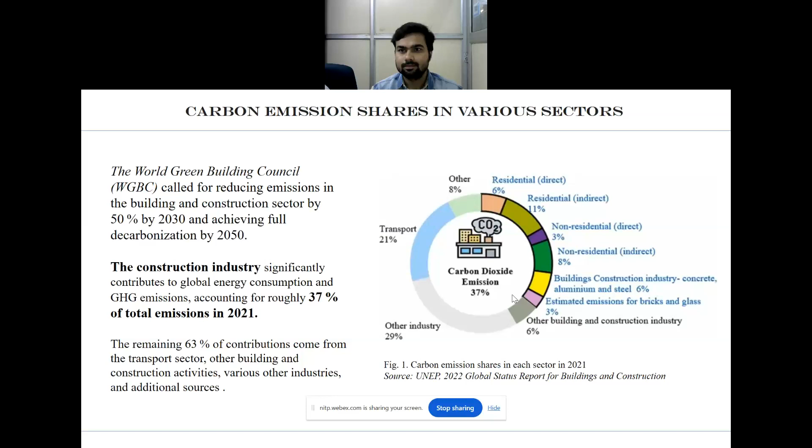So the remaining 63% contributions come from the transport sector, other building and construction activities, various other industries, and additional sources. So you will find that even though 63% is left behind, it is also mainly from the transport sector and other building construction activities. So in effect, total consumption goes above 60% from the construction industry itself.

Now let us see the next aspect of it. This is energy related to the building sector. So total operational energy demand of the building sector amounts to 34%, which includes 30% building operational energy demand and 4% usage by industries that manufacture building materials.

So if you see again the same way, the highlighted lines - residential is 21%, non-residential is 9%, and building construction industry is 4%, materials such as bricks and glass 1%, and other building construction industry is 3%. This is the UNEP report of 2022.

So you will find in all these things, the residential buildings, the building demand will be 34%. Now you have to combine and read the first slide and second slide together.

First is the carbon emission, which causes greenhouse gas emissions. And you know, these greenhouse gas emissions are causing climate change, overheating, and all those things. The heating increases, the temperature increases from year to year, and that causes melting of ice, and then it causes flood, it causes rising sea level. It makes countries lose their coastal areas, and we are all finding flash floods and all these types of natural calamities which are linked to this carbon emission, which is because of energy consumption.

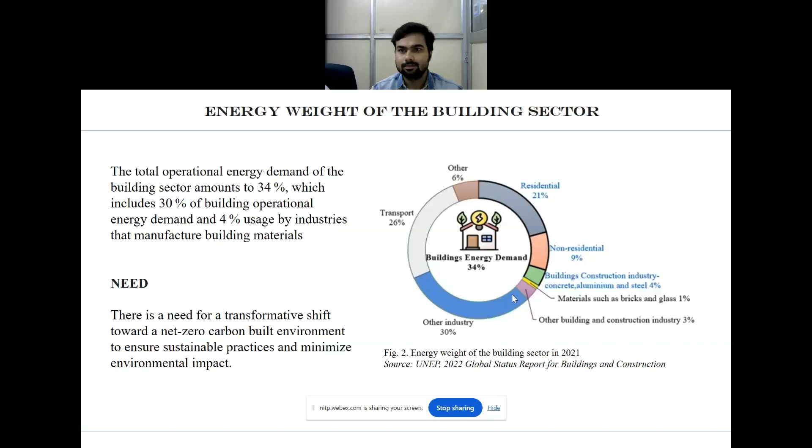Now let us examine the net zero concept. Net zero is a term that refers to the reduction of greenhouse gas emissions generated from resource consumptions to as close to zero as possible, and the concept is applicable to all resources. Now let's see which are these resources.

Net zero energy is one, net zero water is another, net zero waste is another, and net zero emissions is another. So you will find that basically solid, liquid, and gas, this is basically waste, and consumption also will be there in all these sectors. So net zero water is also important, net zero waste is also important, and net zero emissions is important.

Now just for an example, if we use the energy use, space heating, space cooling, domestic hot water heating, lighting, electricity for devices and appliances and others, these are the energy uses in it. Now you find that then the energy generation is basically solar, then photovoltaics, the solar thermal and geothermal and others.

Now a net zero building, its energy use is satisfied over a typical year by energy generation from the renewable energy sources. Although this is the working definition of net zero, we have to consider the total amount of materials consumed by the building phase itself, and then the operational phase, and then the demolition phase. All the three phases are to be covered, which I will introduce in the next slides.

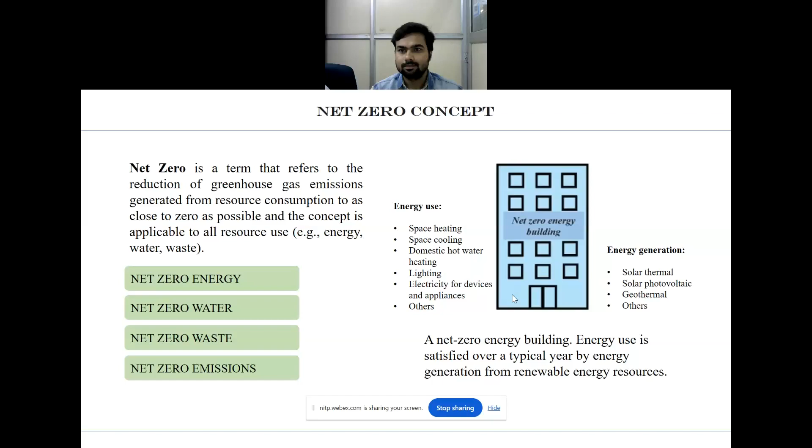So most important is the definition. How do you define net zero? Net zero is per year consumption of energy and per year generation of energy by the building is equated so that it becomes zero. But on the contrary, there are many more aspects to be considered while you go ahead with the net zero concept.

Now, the net zero energy buildings are characterized as zero net energy consumption buildings. The total sum of energy used annually by the building is approximately equal to the total sum of the renewable energy produced on site, etc.

So the figure shows here the total energy used in buildings and the local grid; whatever it is taking from the local grid, it is also given back to the local grid. So in a way, it is on a fulcrum, and you find that the energy use and energy consumption becomes net zero only when the energy used is equal to the energy produced.

So you will find that the products and services are the next 2 decades. See the projection. Now, if this is 2017, 2018, 2019, 2020, 2025, and then projected to 2035, it's going to exponentially increase. So since this is exponentially increasing, why? There is development going on, huge development going on around the globe.

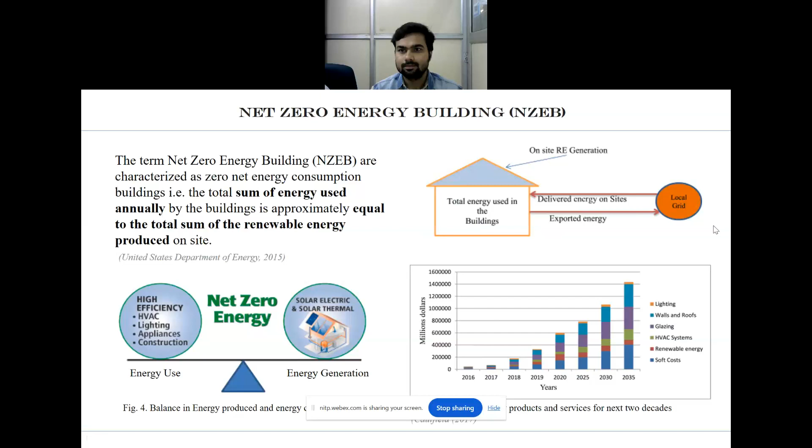Number one. Number two, climate is already changed, and we know that it cannot be reliable as in the older days. And we need all things to be brought back to the original state, which is called the resilience of the structure. So if a building gets vanished by flood, then that building has to be rebuilt. So this is another important aspect that you have to consider in it.

So in a way, you will find that we have this lacuna, the challenges, basically legislation, policies and regulations. There are no clear policies stating how exactly things are to be done. What are the penal clauses there? What are the effective working, like subsidies? Then the laws and regulations, awareness creation, and public education.

See, many of us know, we are learned people and we know that net zero is important. But then green is also important. It was the talk of the day every time some years before. Then it came to sustainability. Now it's coming to net zero buildings. Now we are all aware of it, but what about the end users?

See, for a green building, green rating systems are there. GRIHA is the national rating system. And if you want to get a GRIHA certification, the documentation process itself is costly. The money that you have to invest on a certificate is definitely a huge amount, considerable amount, and normally clients will not prefer that.

Moreover, that is the main reason why we are not getting that clear picture of how many buildings are green or sustainable or net zero. Now, everything requires a certificate in our life. So, are we willing to pay for the certificates, or are we going to really benefit from the strategies that we have used? This is a basic question.

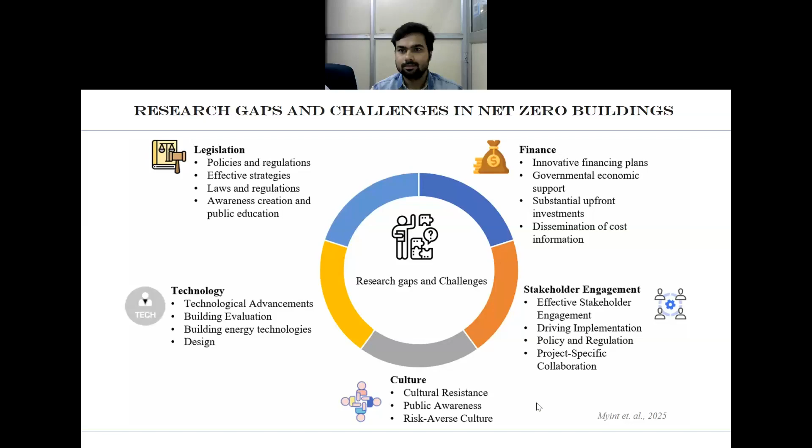Risk averse culture. Now we have a culture where we don't take any risk. So if you get a government job, then it is fine, life is secure. Now this is our attitude. On the contrary, those who get into high risk investments bring a lot of money to their account. So this risk averse culture has to be understood well, and we also should venture into taking risk, so that we will benefit from that.

That means, how are you going to use the already built materials? Will they return to reuse, or will they go through some sort of modification and be at least partly recovered? These are questions that we have to raise. So architects have a very high role in the first stage and in the last stage. Now, you will ask me why the architect is important in the first stage of construction.

I'll say that the construction is basically design to construction. That complete stage is there. So any decision that architects make is going to have a very high impact on the operational and the emission of carbon. So this is very, very important. And then what material you choose, what systems you adopt, that is going to have a big say on the end-of-life carbon. So this is why I say that the role of architects is very high in the beginning and the end.

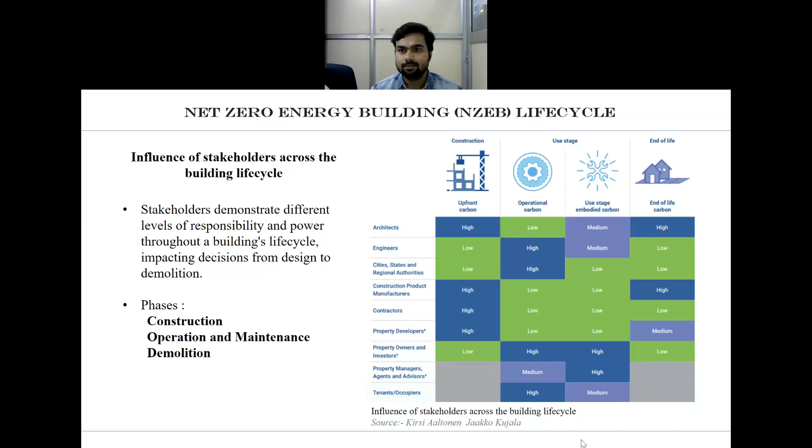But then you have to find the essential difference between net zero, green and sustainable. This is a question we need to address philosophically first, then systematically break down, and then do a value analysis of each of these things. Only then will you be in a position to proceed with the net zero building and achieve the net zero goal. Now, you might ask why this value analysis is important.

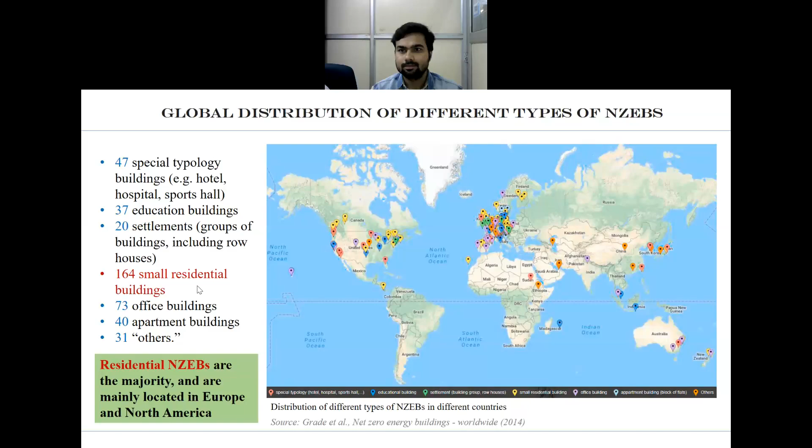Let me go forward. If you want to ask any questions, that also is permitted. Otherwise, I'll finish it and then you will get time for your questions.

Now, broad design considerations of net zero goals. As I told you, net zero site energy, net zero source energy, net zero energy cost, net zero energy emissions. What are the design principles? Design for comfort and function, airtight buildings, building enclosure. Why airtight? If it is air conditioned, then leakage is a villain. Whatever air comes through is going to affect the cooling efficiency of the interior. And the moment the cooling efficiency is reduced, the consumption of electricity is going to be on the higher side.

Controlled ventilation. You don't need so many air changes which are not really required. If you have more air changes, it is good, fresh and fine. But you need to strike a balance, whether you need the right amount or are you going to exceed that. And the codes are coming to your help here. So insulation that exceeds present energy code requirements is needed. The insulation prescribed in the codes is what it is, but how you can increase the insulation is another thing that comes under maintenance.

For example, even if you use rock wool for insulation in an air conditioning duct or some other area where you need insulation, imagine that the maintenance is poor and water starts leaking. The moment water comes into these insulating materials, it alters the capacity of the material to conduct heat. That will differ, and the insulation value will also be very, very low. So control water, moisture and movement by building.

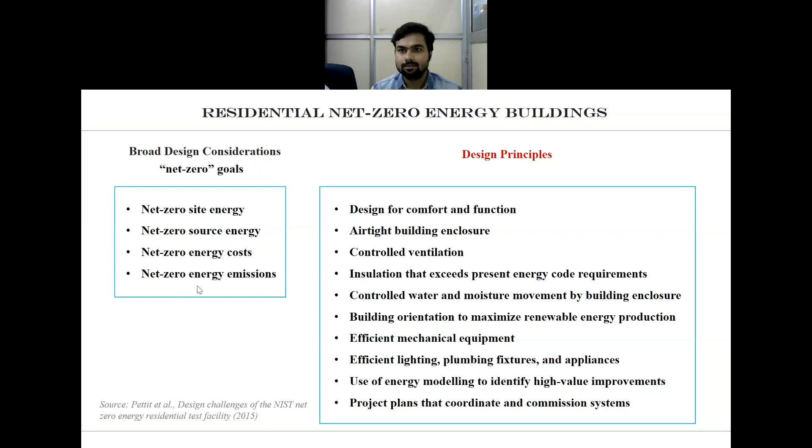Hello. Hello. Hello. No, sir. No issue.

Please continue. Okay, fine. Controlled water and moisture movement by building enclosure, building orientation to maximize renewable energy production. This is something which we learn in our second year climatology classes, but they are very important. If you orient to the western direction, then definitely it is going to get heated up. In spite of the greenhouse effect and all these things we are studying, it is going to affect the air conditioning cost of buildings.

Why are we still preferring glass facades, style, contemporary choices? You want to match up with something that you have seen in the Gulf or in the US or some other country. I don't know why the Gulf is using that. They have their own wonderful traditional architecture. So we will have to go back to our traditions. We will examine these aspects also. Efficient lighting, plumbing fixtures, appliances. You know that waterless urinals are available, but how many of us use it?

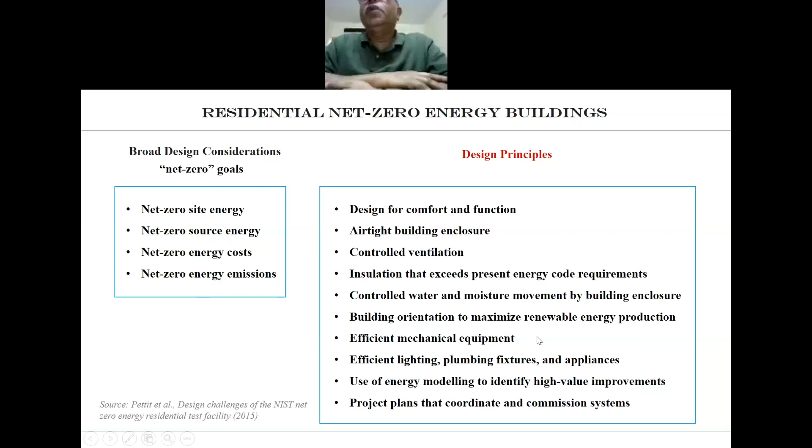Use of energy modeling to identify high value improvements, and project plans that coordinate and commission systems. So we will have to look into all these aspects if we really want to go ahead with the net zero goals. Moving ahead, you will find that the methods to achieve residential net zero buildings are energy infrastructure connections, renewable energy sources, and energy efficiency measures.

Now, electrical grid, gas pipes, you will have to find out. Then district heating or cooling systems, then biomass, and all these aspects will come under energy infrastructure. And then you have renewable energy sources, which are basically solar PV, wind turbines, biomass, and then site renewable power, purchase off-site renewable power.

Energy efficiency basically means building design, efficient HVAC, efficient appliances, efficient controls, and efficient occupant behavior. Let's discuss why occupant behavior is important—this is something you have to think about.

When you have an air conditioned building, how many of us don't close the rooms properly? We just think, okay fine, let the AC run, I can afford it. But with that attitude, how many of you switch off the fans or the bulbs when you come out of the room? These are all behavioral aspects.

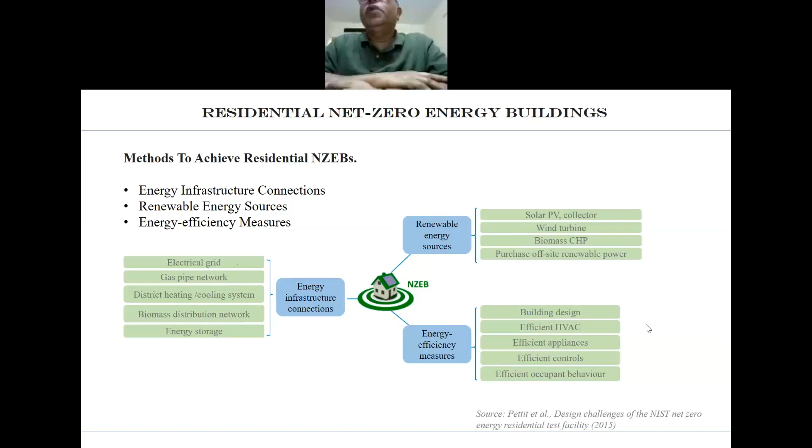If people have an attitude for sustainability or net zero, only then will they be in a position to save energy where it is otherwise wasted. And as I already told you, energy saved is energy produced.

The building sector in India is growing at a rapid pace, and we project 60% of our development will happen in cities. Green buildings have demonstrated about 25 to 30% reduction in energy consumption with respect to national baselines, achieved by implementing energy efficient practices and technologies.

There isn't anything very scientific here—it's basically adopting already existing tools and techniques, adopting our cultural practices and heritage architectural principles, learning from them, and applying that sensibly so energy performance can be increased, energy efficient building envelopes brought in, air conditioning reduced, lighting made appropriate, appliances appropriate, and thermal comfort achieved rather than highly cooled spaces.

Then you go for renewable energy. Wherever energy can be renewed, you will have to go for it. These are some of the principles involved.

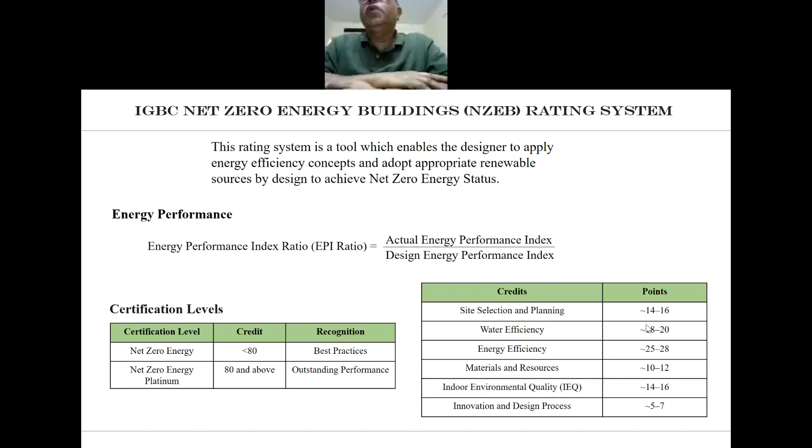So net zero is not simply something unachievable. Net zero is achievable provided our attitude is favorable for that. Now look at this one—these are not certified buildings.

This is the Humanscapes Habitat Urban Living, Auroville, Tamil Nadu. They don't need a certificate for it, but they are almost net zero buildings. Here the brick vault is used, and you need plastering over it, and then the brick vault is ready. Why do we need other types of construction where we use a lot of concrete?

Instead of concrete, they have mud brick walls, compressed and stabilized. Good quality earth is available there, and Auroville makes use of that. So you will find that all these are basic things, and a very minimalistic attitude is adopted all around.

Each of these shells will exert a thrust, so you need a ring beam all around it, and the same ring beam is extended as a roof extension. So multiple roles are assigned to structural elements and built forms, in such a way that you can avoid duplication of materials as well as structures.

It's a community house, and you will find exposed brick, concrete, local building materials, kadapa stone, natural stone flooring. They haven't gone for very high-end tiles. They haven't gone for steel doors. They have gone for the quality of wood which is available there, which is good for construction.

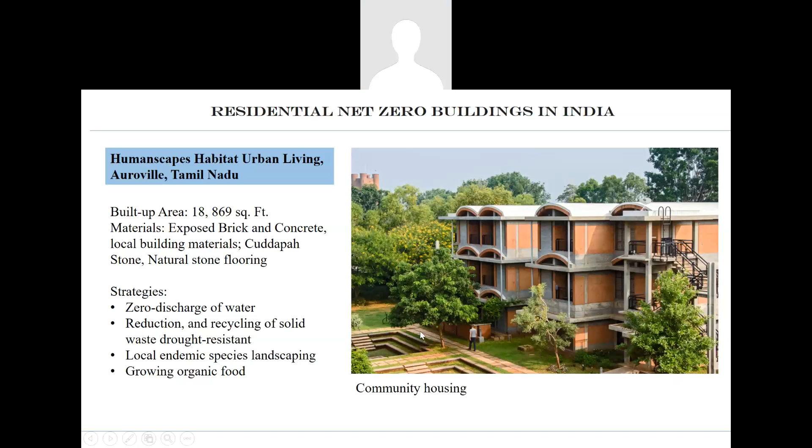So you will notice that the site itself is designed so that the heat intake onto the ground and surrounding area is reduced. You will find more greenery, more brick and other materials, which reduce the thermal capacity and also the reflection of light from the surroundings into the interior.

Now this simple aspect can be taken into a little more detail. We know water is cooling because of evaporation. If there is no wind, the cooling will reduce. So what do you do? You use jets or fountains. But what type of fountain? The more the jet, the more power and electricity consumption.

So bubble fountains, on the contrary, like what is seen in Mughal gardens—the chadars—simply flow water from a level over pebbles, and these pebbles cause aeration and cooling to happen. It's a passive technology. But instead of passive technology, if you use active technology like fountains, that affects the entire electricity consumption. This is one simple example I can bring in.

In the Mughal gardens, the Thuja orientalis trees, conical in shape, are used effectively to direct wind to the trellis, which is made of marble—a high thermal capacity material. When wind passes through this trellis work, it gets cooled, and the cool air comes into the interior. See how effectively they thought about it—without any active energy, they used principles that are basic and sensible. Sensitivity is important, and sensibility is important. That will lead to sustainability.

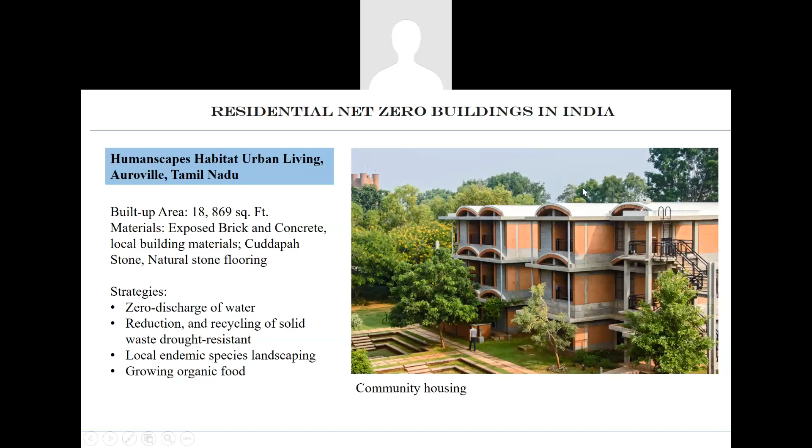Now let's go further to Humanscapes Habitat Urban Living, Auroville, Tamil Nadu. It's the same building, but you'll again notice the points I've mentioned. You'll find these facades everywhere have a projecting canopy. The canopy is very important—just because you have clean forms doesn't mean you get good architecture. Fenestrations and shading are required, and of course you get patterns from the type of technology used, giving a newer type of elevation. You don't need to work hard for it, but you have to make careful choices.

The techniques they have used are basically solar passive building design, integration of water, energy and waste planning, clean mobility options, co-housing concept of living, light and ventilation, and local materials.

Now coming to co-housing: for example, if I have my bedroom, living room, kitchen and all those things, I'm not using the kitchen every time. So two or three families can share the same kitchen—this is our old joint family concept.

So many rooms are there, and the rooms are allotted to people, and the people have a kitchen there. Basic food is served. Rest of the things, if you want to make a bullseye or if you want to make an egg fry, you can go and cook it on your own. The kitchen is for everybody, and they can definitely get the basic meal. But at the same time, if you want to cook something, that can be done by yourself.

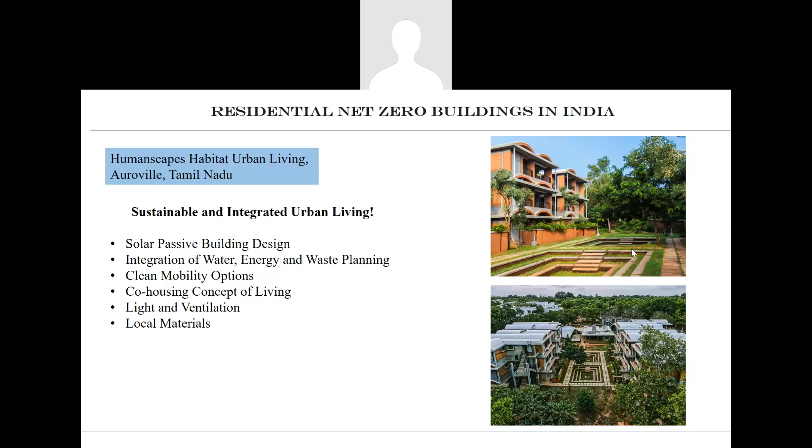So it is not something very cosmetic and cosmic. It is something very sensible, pragmatic, and appropriate. And it is an attitude. So if you keep that attitude valued very high, then constructing and operating net zero buildings is not a distant dream. It is something which you can achieve.

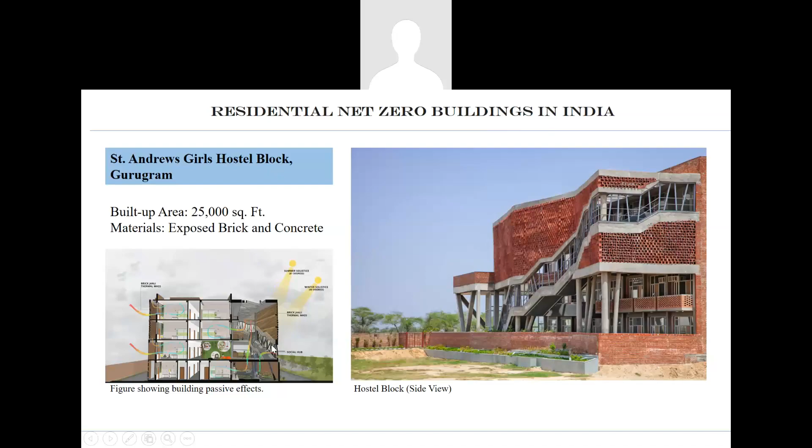Now, this is residential net zero buildings in India. It is St. Andrews Girls Hostel in Gurugram. Now, see, one thing that I just wanted to tell, you have completely double passages. So you will find that, of course, it is lit and ventilated. Here also you find there is a veranda. So the skin is protected by another skin which is exposed, and air breeze will be there, it is airy, and it is also shaded.

Now just look at the traditional Indian buildings, wherever you are, whether in Bihar or in Kerala, the same principle they have adopted there. If you look at the Kerala architecture, there also you will find a clean veranda all around the built form. So the built form is not directly exposed to the sun, wind, and rain, but on the contrary, there is a veranda to protect it, and that means the amount of energy required to maintain that building is far less.

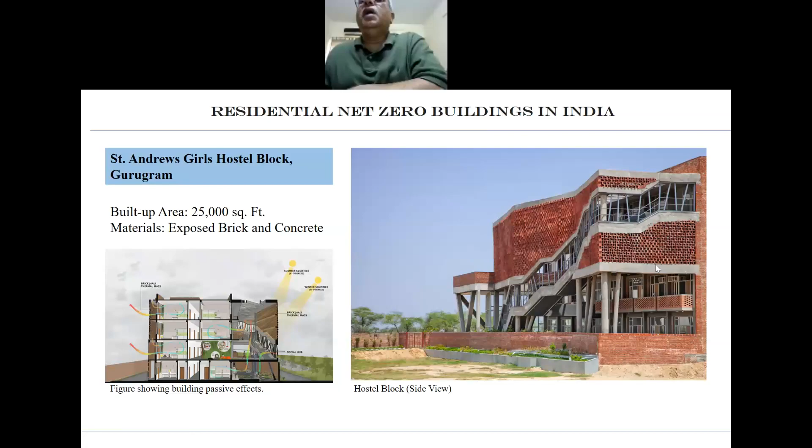Let's go quickly. You can see here the double verandas. You can see here it is pergolas. If you wish you can cover them, but this is already aerated. It is end to end open. So you will find that the entrance foyer and the lobby face to the west, but it is open. Double height indoor and outdoor spaces for interactions and social activities. Then double skin facade. This is called the double skin facade.

Now, this double skin facade, you may think it is going to increase the cost of construction. No, you see that they have used very basic ordinary materials for it, and that is very critical use of it. So instead of glass and steel handrails, they have gone for a simple brick jali suitably designed. So you get something here. All the beams are exposed.

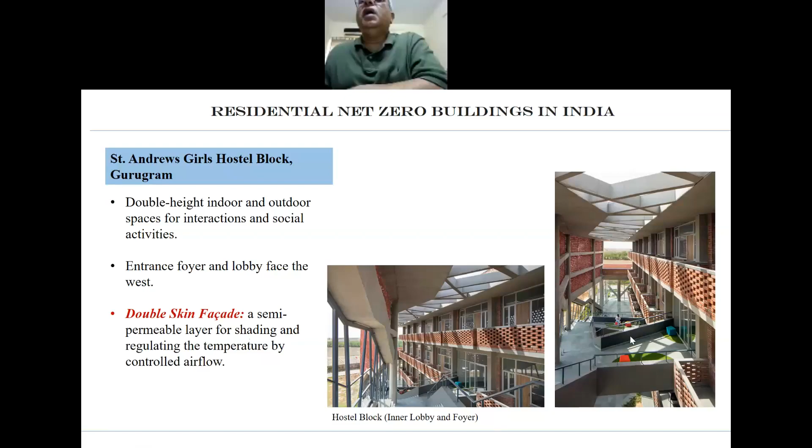Now, see, exposed surfaces. You see everywhere there is a shadow. There is a play of light, and you have enough ventilation. And the flooring is also not that costly; what is available looks like Cuddapah stones. So in effect, the building form is sensible. Now, this sensibility is very important. As I told you, it should be pragmatic, sensible, and you must be sensitive to things and keep that attitude of net zero in.

Now, let us see net zero built forms, design parameters. Passive design parameters are azimuth angle, the window status, exterior wall thermal insulation, exterior wall solar absorptance, roof thermal insulation, roof solar absorptance, window-to-wall ratio, window types, and overhang projections. Now, this overhang projection, I explained. Everywhere you can go for explanation, but we may not be able to cover the full lecture then.

That's why I'm limiting and giving you an example. This absorption is very important, solar absorption, which we dealt with already by improving the properties by the use of white colors. We have already explained. Now, overhang and projection.

Overhang projection, basically what is it? You imagine an umbrella over your structure. That is the overhanging projection. That means your structure is all protected, and everywhere, even brick can be overhang bricks. See, when you put the brick projected out of the wall, alternatively you will get a self-shaded wall.

And self shading of the walls means it is already protected from the radiant energy directly coming onto the brick. So that means it is already in shade. Only thing is small shades cover the entire surface of the brick wall, and such type of built walls will have less exposure to solar energy, and therefore it becomes more cooled in that process.

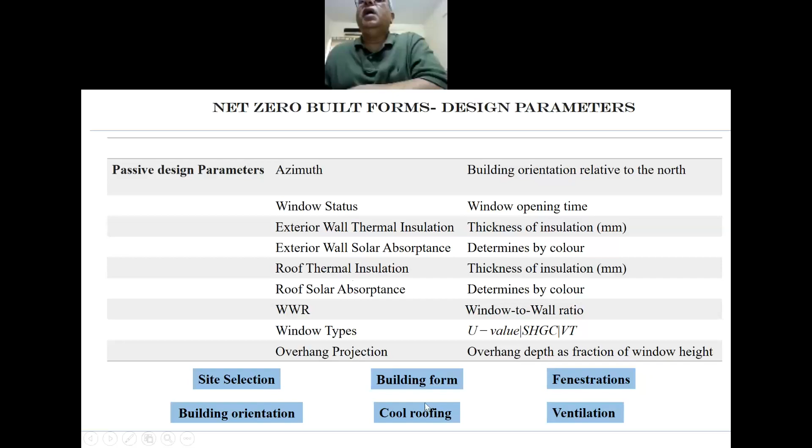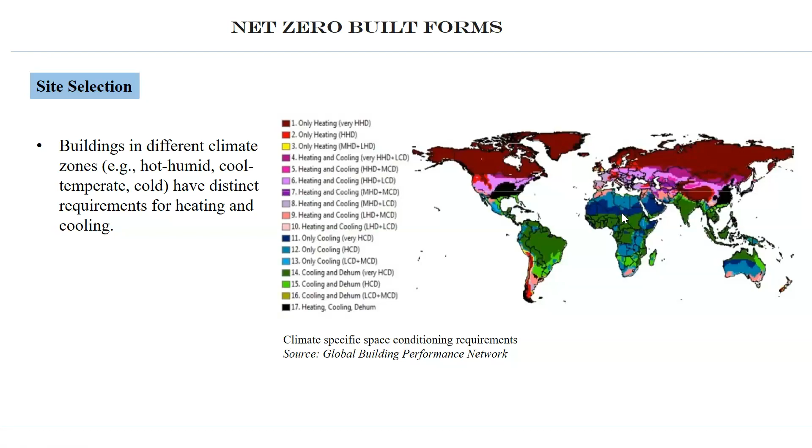So if you look at the African situation, they have all passive type of technologies, and you will find that they learn from nature a lot, and they also go for adopting such techniques, which you will study as biomimicry, which I will come to later.

Now site selection, which are the factors you will look for? Solar energy, radiation, climatic effects, accessibility, population density, green space availability, proximity to renewable energy sources and materials. So heat gain, if you want to reduce it, the orientation is important. Mapping of land surface temperatures is important. Evaluation of transportation networks and connectivity, because transportation is important.

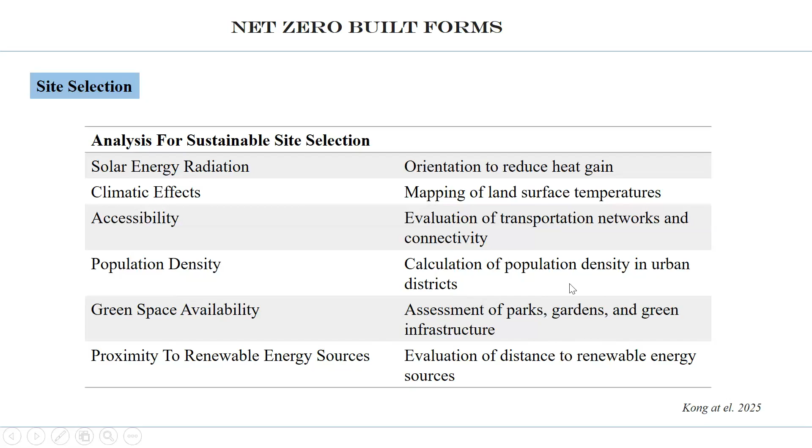Calculation of population density in urban districts, that leads to different services and assessments. Now assessment of parks, gardens, and green infrastructure. You know that there is something called the urban heat island. So if you want to mitigate the urban heat island, then the amount of green surfaces must be more, green and blue surfaces must be more.

Coming to the other site selection and development, protecting sensitive sites, preserving undeveloped sites, say like green fields, brown fields, gray fields, etc. Then restoring and reusing previously developed sites, retaining soil in place, stockpiling and reusing soils, etc. I'll give you a simple example to illustrate that.

I was designing the master planning of NIT Andhra Pradesh. Karaikudi or something like that. That place I don't remember, but that was an old airfield. So my intention was to keep the runway as it is as the main thoroughfare, and then build your buildings so that you can save a lot of money on the roads and other aspects, and then you will get an axial design also for the buildings. And it was working quite well.

I designed the built forms also and then presented there. They accepted it, but then came the central PWD. When the central PWD came, they brought in their own zigzag forms of design and all fancy shapes and materials and all those things. See, the interest lies elsewhere, not in net zero. Interest lies in profits. The profits, in whatever form, I don't want to elaborate on that, is something that bends your mind away from net zero.

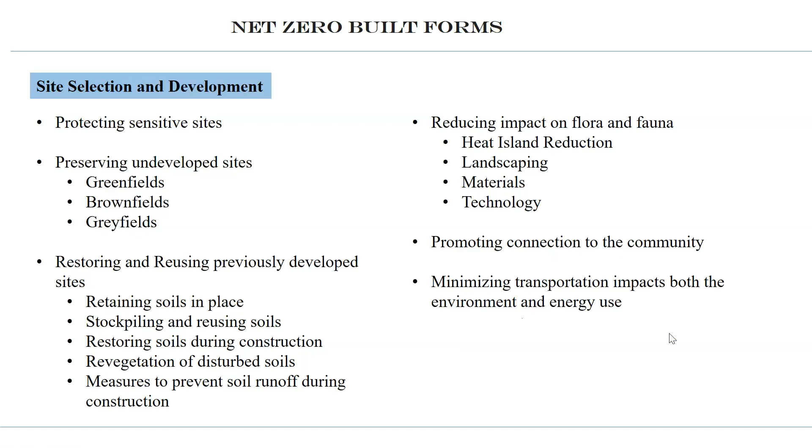So the quality of work, sensibility, sensitivity, and the performance are very important. The implementation of standards, prescriptions, and specifications are also very important in achieving it. Now here we are seeing the building orientation. If you orient to the south, then you will get a lot of energy. On the contrary, on the northern side there isn't such incidence of solar energy.

Now sizing. See, for example, a sphere has the maximum volume and smallest surface area. Can you use that mathematical principle to design something? Buckminster Fuller used it.

So floating cities he designed with the Fuller domes. Now similarly, a circle gives you maximum area and minimum perimeter. That means material consumption will be directly affected. Now these are concepts. These concepts are to be appropriated into your design.

Fresnel squares, as I told you: one square is there and within that is the site, meaning you have to bring the buildings to the periphery, and then you have an interior and exterior landform where you can have plants and other things.

So, in effect, what I am saying is your built form should not be exposed to the aspects of weathering. On the contrary, you can have a total projection over it and then shield the whole building. Otherwise, you will have to do it later on when your roof starts leaking. You will have to put another roof.

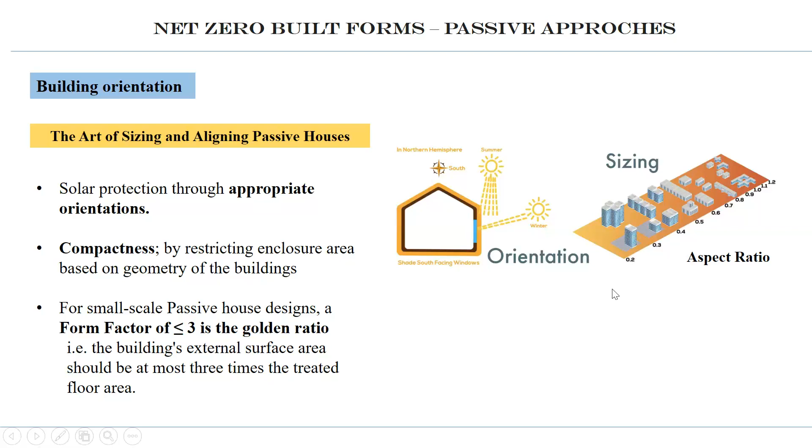Similarly, when you consider the aspect ratio, also think about the wall. What is it made of? Is it again glass? Then it is going to be a hot oven inside. You must understand and appreciate that and tell the clients to go for something which is good for achieving your net zero goals. Now, similarly, the built form design.

See, if I design the building like this, I have more area, at the same time it is landscaped, and the exposure to environmental elements is less. Now here it becomes two blunt blocks, and you have a tree, whatever it is, but the exposure is there.

So the angle of exposure, the threshold is 18 degrees; an angle of enclosure of 45 is equally covering both sides. Now, if you want wind flow, the spacing must be 2h. If this is the height, then the spacing has to be 2h, at least 1.5h should be given. Are we considering these aspects? This is something we need to consider when we design for building energy efficiency.

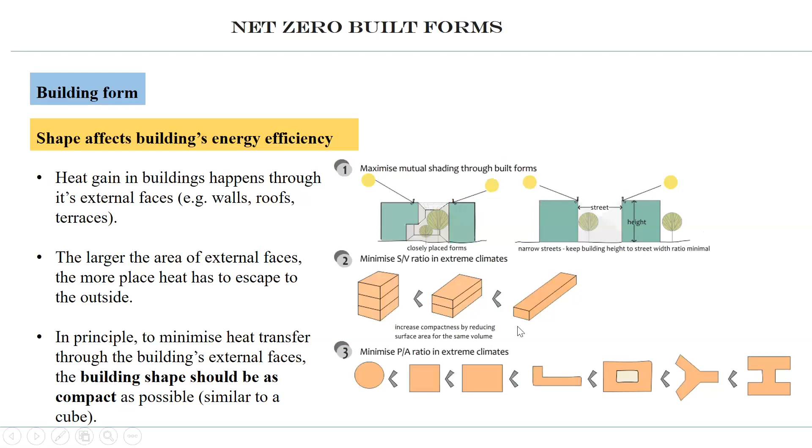So, building shape should be as compact as possible. At the same time, it should also promote ventilation and the maximum amount of views available, which will refresh your minds. That means the building becomes not a simple enclosure but a habitable space where people are happier, healthier, smarter, and able to enjoy the building.

Now, just as a simple example, I'll give you a 400 square meter building. Just design the floor to floor height, whether it is 3 meters, 3.15, or 2.75. You work out the amount of materials required for the periphery walls only. Simple building, don't go for inside connections and partitions. Just the 400 square meter residential built form, which is a reasonably higher income group building.

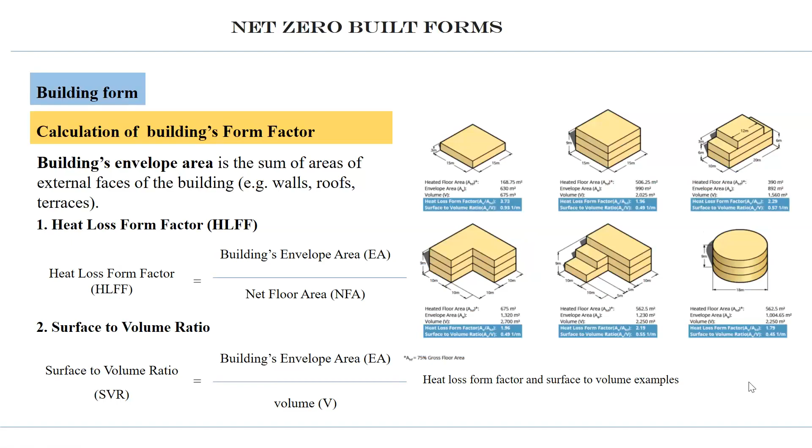So you will find that the amount of bricks, mortar, plastering, ventilation, lighting, all these things are going to be different. So in effect, working out the heights itself is a very, very important step in obtaining your net zero building goal.

Now you will find that there are so many principles. See, cool roofs, green roofs, these are all traditional ways of protecting by reducing conduction. Now you can have a cool roof. Maybe it is water, maybe an exposed white surface, roof ponding, so many things. And you can also measure the internal air and ceiling surface temperatures pre and post application.

You will find that the upper temperature, compared to pre-application, has come down by at least 10 to 20 percent. You will find the difference.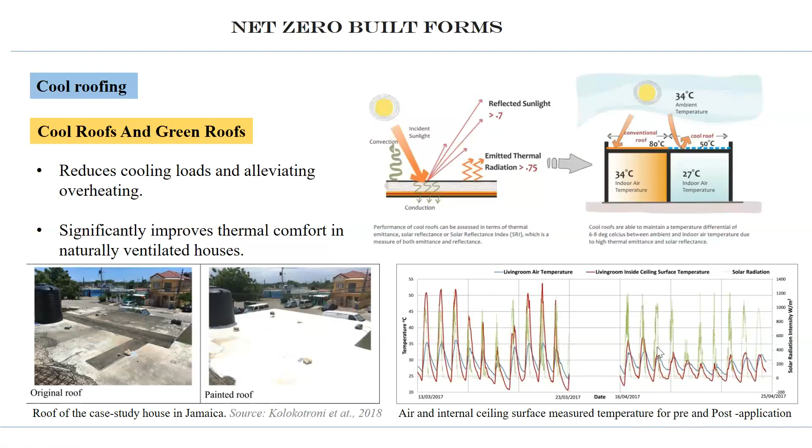Now, when you say cool roofing, there is urban farming. This is one concept which I wanted to introduce to you, where you cultivate whatever vegetables, whatever things you want on the roof. Now it has got a double advantage. You have your vegetables, and at the same time you have your cool roof also.

Now it has got a lot of benefits. Say for example, if there are an old father and mother, aged people there, they can go up and maintain it and all those things. Children can go up and enjoy, take part in it. There is more activity.

See, the problem is there are no engagements for children, and they go on using WhatsApp and other things. And I don't know what Instagram is. All those things are there, spoiling their time. And they say, finally, in the end, I don't have time, mummy. I don't have time to do this and that. Why don't you have time? Because you are using it. Time is constant for everybody, 24 hours God has given, but how you use these 24 hours is very important.

So if you go for a green roof with urban farming, or you can call it roof farming for simplicity's sake, then you will find that these roof farms or urban farms are very good. Wherever the consumption is, there the production is. If the consumption is also where the production is, then there is no transportation cost involved, no pollution, no energy. See, your dependence on other forms of energy, maintenance, and all those things is reduced.

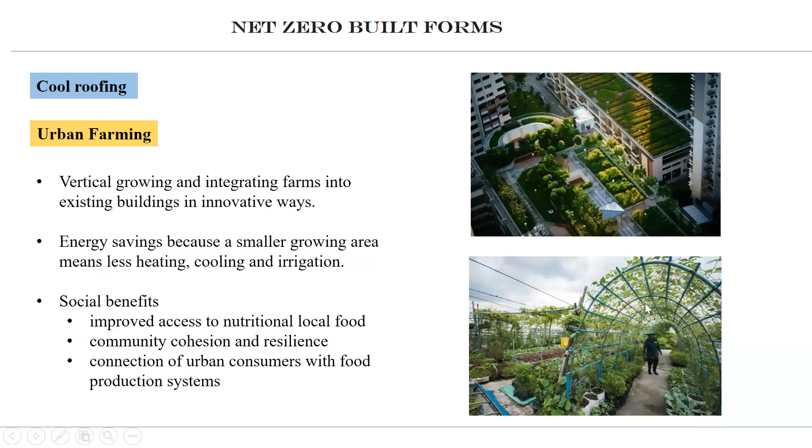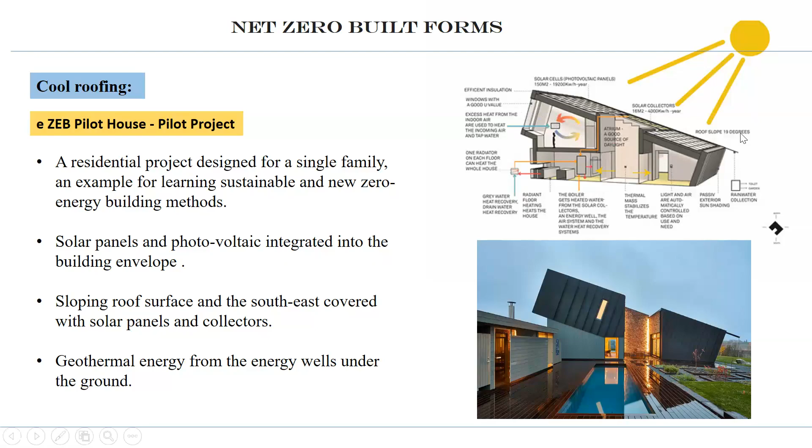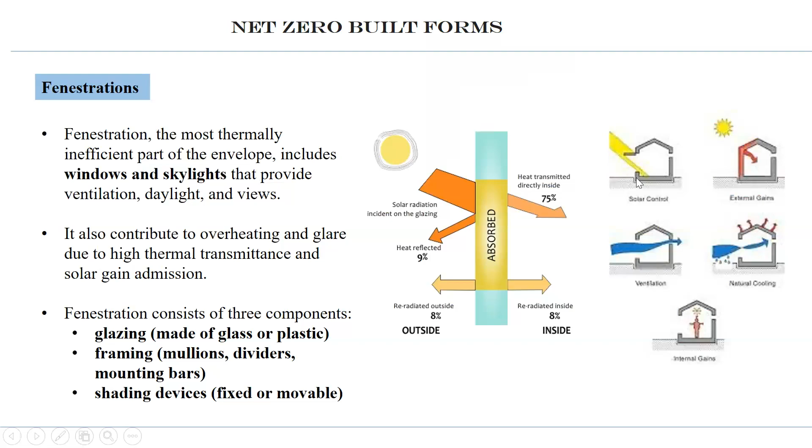But on the contrary, if it is an RCC sunshade, the heat is right at the window. Whenever air flows inside, the heat is also going to be brought in. So these are simple things, but you have to take notice of all these simple things. Different types of net zero strategies, movable shading, fixed shading, all those things are available.

So go for the technology which best suits you, for which awareness is very important. The architect must be well aware, must attend conferences and material exhibitions and all those things. He must have his own building material library, and he should understand the process behind it. It is not just recommending green glass or reflective glass. It is recommending with a purpose.

You know that our own Charles Correa made the LIC building in Connaught Place with a reflective glass facade, and it had to be removed because it was causing so much environmental reflection, and drivers met with accidents because of the painful glare coming into their eyes. Finally it had to be removed. See, great people also can make mistakes. We also make mistakes. So mistake is not the thing.

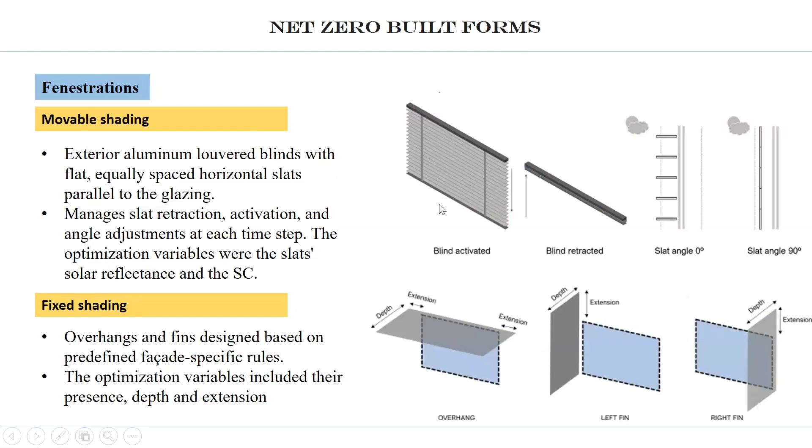The point is, to the extent possible, you do a truthful analysis and go for a value engineered solution so that your cost will be brought lower, and at the same time you keep the attitude for net zero. Then it is possible to achieve your net zero building forms.

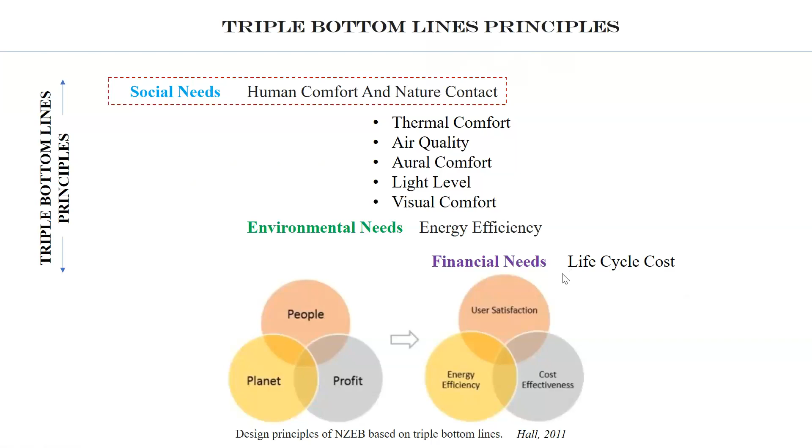Now, triple bottom lines. See, for sustainability: people, profit, planet. Now, here the financial needs: user satisfaction, cost effectiveness, energy efficiency. So, I recommend a life cycle analysis, not simply a net zero year by year, but total life cycle of the building: how much it takes in, that much it should also produce, that much also it should reduce, so that energy which is not consumed is energy which is produced. So this principle of three pillars is very, very important.

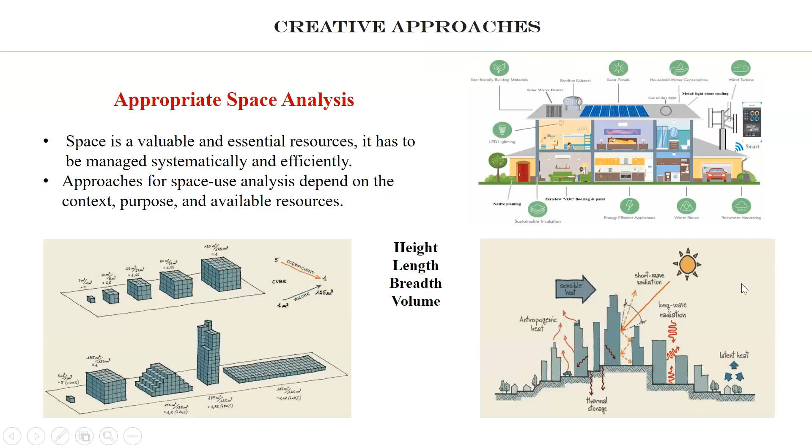Now, coming to the appropriate space analysis, see, all these things are there. Now, if you put two buildings, this place is going to be highly reflective, and urban heat island formation is potentially possible, unless you go for thorough ventilation. So height, length, breadth, volume, aspect ratio, and volumetric analysis are very, very important, and these are some of the schematic things that you can use for your technology integration with it. So form analysis is very important, volumetric analysis is very important, geometric analysis of the cityscape itself has become very important if you really want to get the overall net zero into your built forms.

Now, creative approaches. Until now we were speaking of something where we need to invest money. Now, let us look at some of the options where you don't need to invest money. Say, for example, management principles. See, retrofit strategies with energy reduction. If you go for upgradation, retrofitting, then renewal is not an essential thing. That means you don't even need to go for a new building. All the matter, all the building, all the systems are conserved, only upgraded. So that is one way of doing it.

Now let us look at the energy side itself. Say in the early morning, from 5 or 6 o'clock onwards till 8 o'clock, you can keep all your windows open and bring all the cool air inside the building. Then by 8 or 9 o'clock, you shut the windows. That means the entire afternoon your house will be cooler. And then when the insect flow stops by 7 o'clock or so, you can put on your light bulbs and again open the windows so that you will get fresh cool air from the outside. Now this is called thermal management. So what is used is your energy, your attitude. It's a management aspect of it.

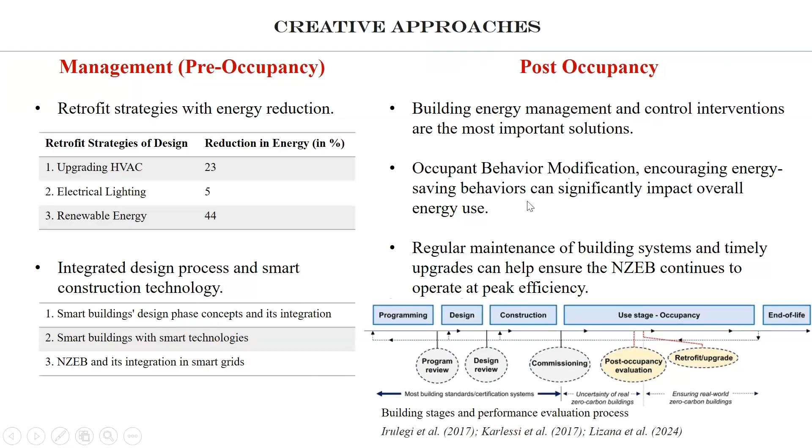Post occupancy, building energy management and control interventions are the most important solutions. Here, for example, check the operational manual: are the people responsible for the operation of the building really functioning or not, or are they simply coming and putting the switches off and on whenever they like? Or can you remove that particular person and fix an automatic, sensor based device, say motion sensors, so that only when people pass will the light switch on and off according to the movement. Something like this, you will earn a lot of profit by removing that particular person. Payment, pension, all those things are reduced. At the same time, you need movement based sensor equipment, so that will be resolved at very low cost.

Now, the other methods. Think about the other methods. Building envelope design, intelligent multi species habitats. So you go for birds and bees and all these things put together. These are all required for us. We cannot think that Earth is completely ours. Earth is for other things also. We need to care for that.

Design for animals is another principle. There's a book on it - if you go through that, you will understand that principle better.

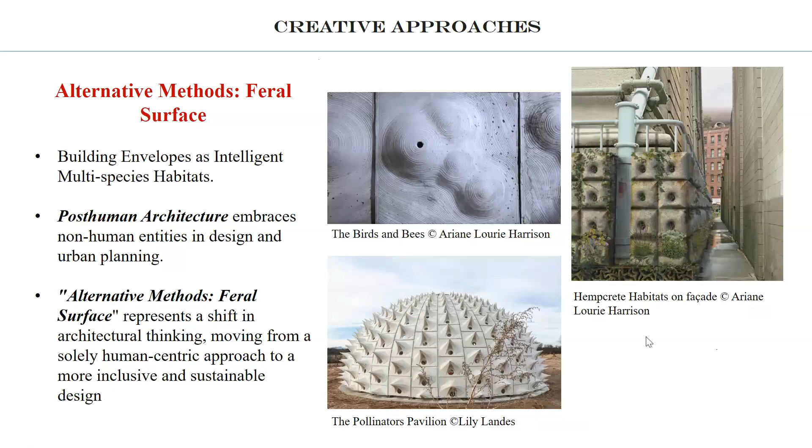Now you will find alternatives, like feral surfaces. These are surfaces where you can plant, meaning the whole structure becomes a plant-oriented building, just like the roof gardens or roof farming we suggested. You can plant on the feral surfaces - on vertical surfaces, domical surfaces, inclined surfaces. This enhances the value, and it is modular in shape, so any geometry can be constructed out of it and you can standardize it. When a particular technique is developed, that technology will involve feral surfaces which adapt your building to nature and its requirements.

Then biomimicry - for example, self-cleansing surfaces. You must have seen water lilies and their leaves. All the dirt that accumulates on the leaf, when water rolls over it, makes bigger and bigger balls and rolls down, carrying the dirt off the surface. If building surfaces are designed such that they become like self-cleansing surfaces, that is learning from nature - this is called biomimicry. Nature-inspired self-cleansing surfaces is one such example.

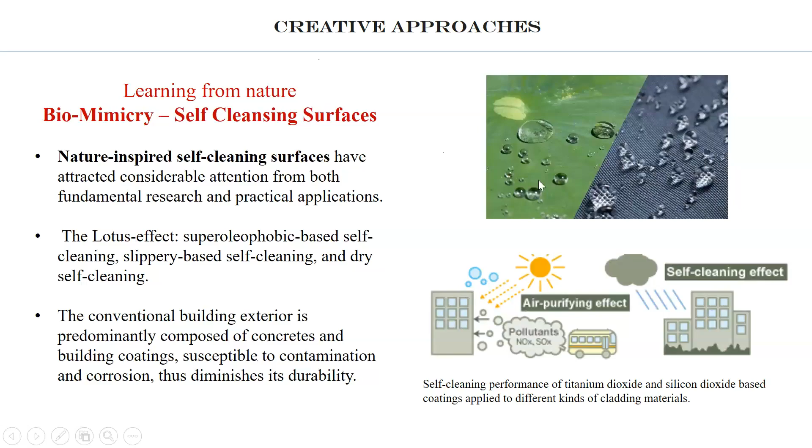Then there's the lotus effect - another thing you can look for. Conventional building exteriors are predominantly composed of concrete and coatings, susceptible to contamination and corrosion, which diminishes durability. So if you go for a self-cleansing surface - similar to self-shading which we learned - if the surface gets cleaned on its own, you'll find your building's net zero approach becomes very, very effective.

Now this is a case study from one of the villages here, where Bengali - I think Santhal - people live, and what the government has done. This is called the Bishnupur village case study, done by our MR students.

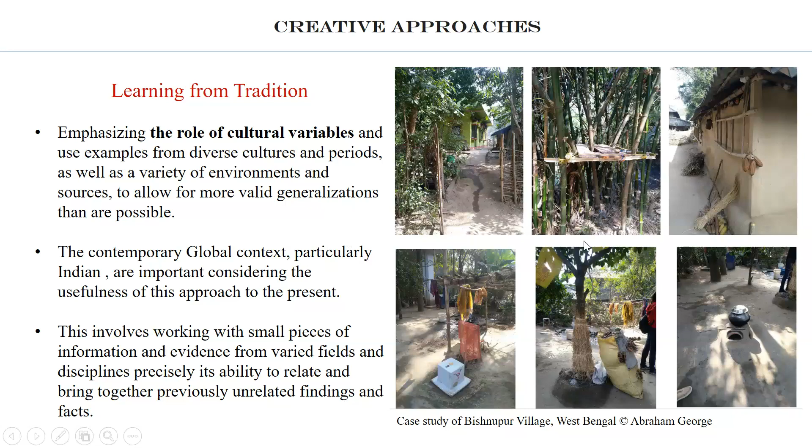So all these are basic physics. Exposure of the students, understanding of the designers about the basic physics of the building, these are the things that will take us to the concept of net zero, to actual reality.

So, low carbon behavior, living car free, mobility, fuel efficient driving, you have different options available. Now, in housing, less living space, low or multiple use spaces, low carbon building materials, adopting energy efficient home appliances, then in daily living, energy efficient cooking methods and cookware, avoid food wastage.

See how much food we waste. That is very very important. To produce grains is very very difficult. You have to buy it with a high cost, then use energy to cook it, and then finally you waste it. Why? Eat a bit less so that your stomach also will become comfortable.

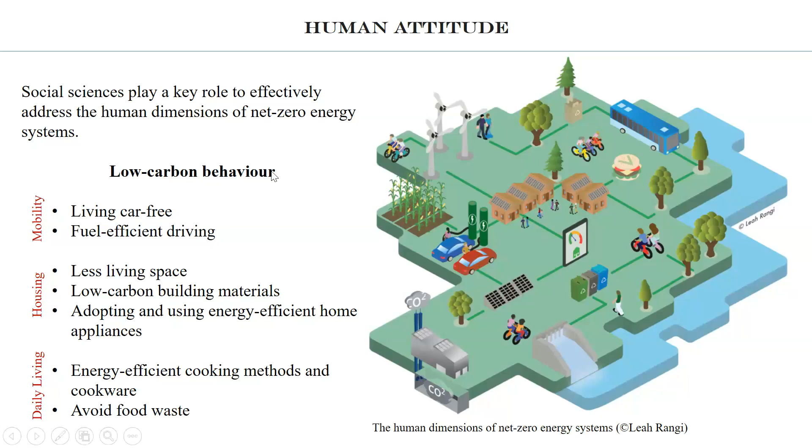So I think we need to have this total sincere attitude of net zero so that we will be in a position to attain net zero building. So you have got circular economy, citizenship behavior, and altruistic, biospheric, hedonic, and egoistic designs. For others, it is for oneself.

So finally, my message is be sustainable in your attitude, be sensible, sensitive, understand the building physics, understand the traditions and the culture, and build for ourselves, not for somebody else. Build for ourselves. And thank you so much for this. If you have any doubt, I'll try to answer.